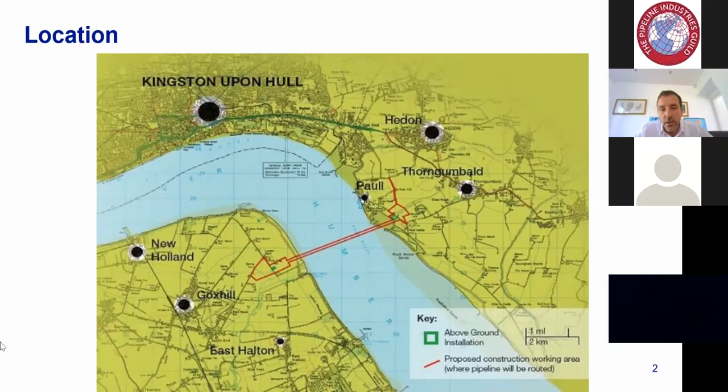So the reason why we're here, so the existing crossing of the Humber, which was laid in 1984, is approximately 5 kilometres. It is one of the most important pipelines on the national transmission system, and it takes gas predominantly from the Easington terminal and then delivers it through into the heart of England via this river crossing. It transports at peak demand up to 25% of Britain's gas, so it is a very critical pipeline in the network. Now, over time, the Humber estuary, the riverbed has shifted.

The tidal forces erode and move the riverbed, and it goes through 100-year cycles. And what happened, it had been identified that the riverbed was moving, and we've got another feeder crossing the river in a very similar location, feeder 1. That pipeline became exposed, and it actually became eroded underneath the pipe as well.

So it was what they call free spanning. So a decision was made that pipeline would have to be decommissioned. During the decommissioning of that pipeline, it was degassed and purged, and then it was being filled up with nitrogen. And it actually subsequently failed when it was being charged up with 2 bar of nitrogen.

So it was a real indication, whilst it was an older pipeline, that the existing Feeder 9 pipeline in a very similar location is potentially at the same fate as that. So in 2009, we had to lay what they called concrete fronded mattresses above the pipeline, and we had to do that during the slack water. So it gave us a window of around an hour and a half to place the mattresses in

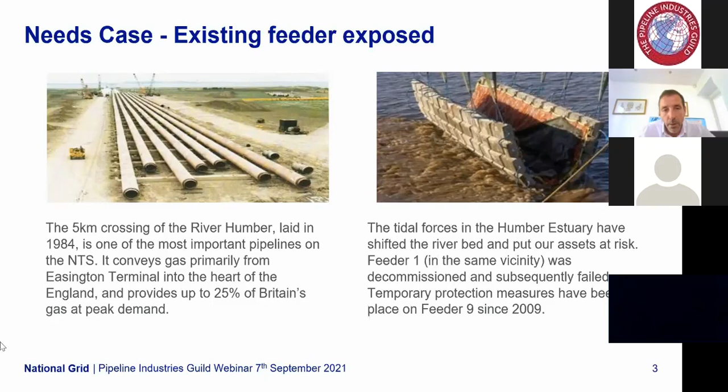So we had to consider a number of options. Now, obviously, primarily, we need to do this in an economical and efficient way, but we also need to select a technique that's actually physically possible to achieve, and also consider some of the long-term effects of the technique and also any environmental constraints that we may have.

So one of the options that we did consider was a direct pipe method. However, at this length, just over 5 kilometres, the technology isn't quite there just yet to get a pipe of that diameter, which is 42-inch, across that distance. We also looked at an immersed tunnel. These are predominantly used for rail and road tunnels.

Whilst it was a possible scenario, it would have been prohibitively expensive, and obviously Ofgem is not keen on the bill payers paying for something in addition to what we're trying to do, which is just replace a key transmission pipeline. So that wasn't selected.

HDDs, we have done some similar sized HDDs in terms of diameter in the locality. We did a 40-inch one over at the River Ouse in around 2008. But unfortunately for a 42-inch, we've not got the ability to drive that 5 kilometre distance. So that was discounted. We also looked at an open trenching technique.

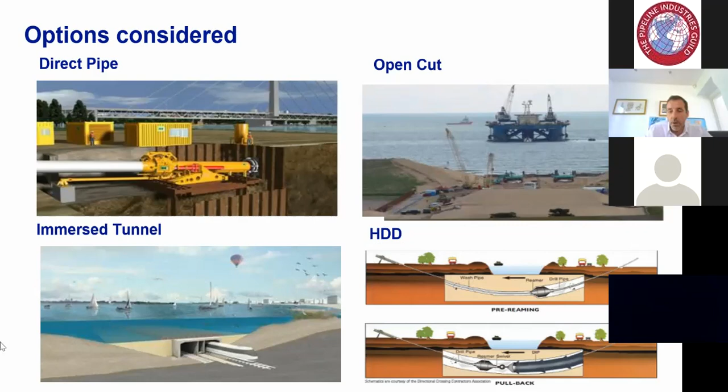So our solution was to build a concrete segment tunnel underneath the Humber estuary, which basically would be the world's longest pipeline river crossing in a tunnel. So it'd be just short of 5 kilometres, and it would be built in a 3.65 metre internal diameter tunnel with a 42-inch steel 70 bar pipeline inserted. And then there were a number of tie-ins at either side of the river below ground to the AGIs.

There were two similar projects out in the world that we were able to reference. So there was the 4-kilometre River Ems crossing between the German and Netherlands border underneath the River Ems estuary. And there's also a 4.2-kilometre Santos crossing in Queensland, Australia.

The key thing to note there is the length. So one's at 4 kilometres, one's at 4.2. We're obviously heading towards a 5-kilometre zone. So actually, this hasn't been done before at this length. So that brought its own challenges, to actually get the pipe inserted.

There were some significant technical challenges. So those were the ground conditions for tunnelling, which I'll pick up on a little bit later on, the pipeline protection, and finally the pipe insertion. And that pipe insertion issue, with the pipeline protection issue, actually evolved during the detailed design process.

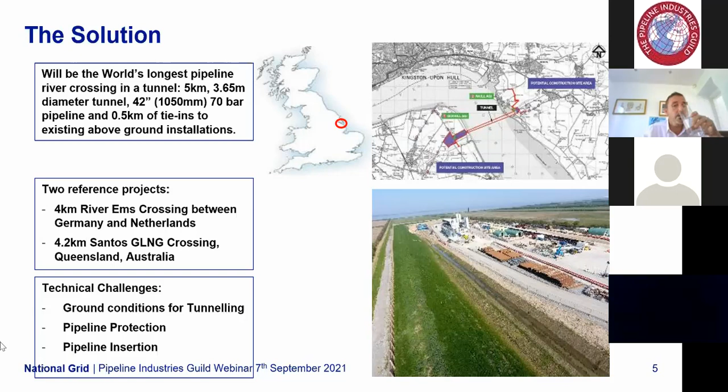Some of the other constraints and things that we needed to consider were the environmental designations of the area. It's probably one of the most highly designated locations in the UK. You might think, well, it's near Hull, it's quite an industrial place, but actually this has got a number of key designations. It's a Ramsar site, which means it's a protected wetland with a special status.

It's a special protection area for overwintering birds, so it's key for the migratory winter patterns for the overwintering birds. It's a special area of conservation for flora and fauna. It's a triple SI, so a site of special scientific interest. There's a migrating birds wetland area. There's also the RSPB Paull Holme Strays Reserve in the location.

There are intertidal mudflats, which are really important for the curlews that overwinter in the area. That's one of the key feeding areas for those birds. And then there's a very heavily populated water vole environment as well. And not only have we got that, but we've also got the standard badgers and protected wildlife to look after. We've also got Schedule 1 birds in there, so we've got marsh harriers in the area. So we needed to make sure that we protected those and our works didn't have an impact on those.

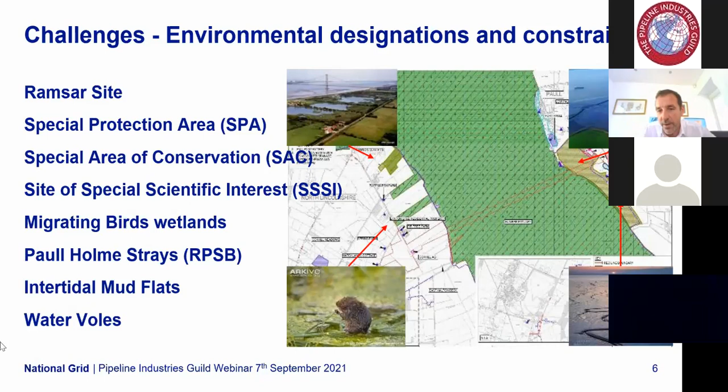And I think that really points you to one of the reasons why we didn't do the open cut again, because we would have to go through all of these areas and it just wouldn't be acceptable to do that now. But we were really proud, and the local community were really happy with the approach that we had taken in terms of how we protected the local flora and fauna and the wildlife.

Because there was such a risk of flooding, we needed to make sure that our key infrastructure was protected. So the generators and the tunnel launch shaft had walls built around them to a height of 3.6 meters above ordnance datum, so that in the event of a flood warning and a flood, we were able to put the floodgates in and seal off those critical areas.

Also our site offices and compounds were raised up to above 3.6 meters, so that if we did have a flood, we would be able to shut down the site, get everybody away, and then as soon as the flood waters had abated, we would be able to return straight back to work without having to consider refurbishing offices and all those sorts of things. So there were certain key aspects that had to be considered as part of the works.

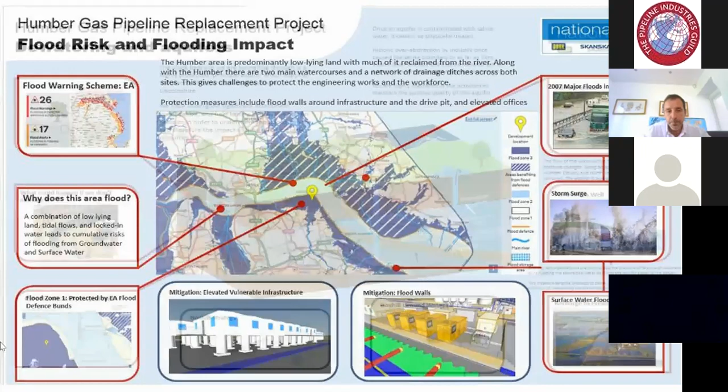But we were prepared. Fortunately, we only had a couple of alerts where we had to demobilise from site, but we never got to a stage where we actually got flooding on the site. But we were prepared for that. Another key aspect for this project is that we're working above an aquifer.

So to actually build our tunnel, we started over at Goxhill on the south side, and we built a 210 metre long, 15 metre deep drive pit, which basically is a long ramp that goes into the ground. That's a sizable excavation, and to actually make the excavation, we needed to dewater. Now, to dewater the ground, obviously we draw water out, bend the water table, and it allows us to construct our pit.

But because we were in an aquifer, there was a real concern that as we were close to the river, it does have a saline element to it. So the concern was that if we dewatered and drew the water out, we could then actually draw saline water in and get saline intrusion into the aquifer. So a real concern for the Environment Agency was this, written really heavily into the development consent order, and we had to come up with a really innovative solution to prevent that from happening.

So what we did was, when we dropped our wells in ready for our dewatering, we actually put recharge wells between our pit and the river. So any water that we drew from the ground, we then recharged back in front of us. So in effect, putting a clean water curtain between us and the river. Now that worked really effectively,

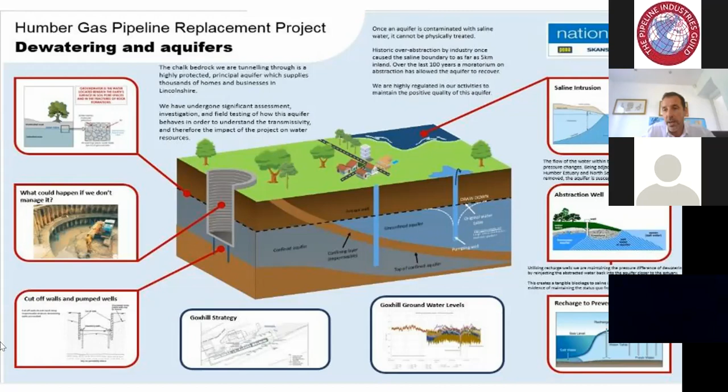Moving on then, so if you can imagine, we're still in the detailed design phase here at the moment. So we're building our launch shaft, but we've got to detail design the tunnel and the pipeline around it. And during that detailed design, it transpired that we came upon an issue with what they call CP effects on the concrete, which is concrete degradation.

And what that meant was that because we were going to be putting a pipeline through the tunnel itself, and we would potentially have to turn the cathodic protection system on, the action of the cathodic protection can actually degrade the concrete segments, and the higher the power that you put in through the CP system, the higher the degradation that you can get on the tunnel lining. So that was a real problem for us. So during detailed design, this was identified, and we needed to come up with a solution to ensure that the 120-year design life of the tunnel wasn't affected.

So in effect, the way that you minimize the effect of CP on the tunnel itself is by minimizing the need to actually have the CP turned on. So what we did was we came up with a solution that in effect, we had a 42-inch steel pipe that would just be dual FBE coated, standard UK pipelining technique.

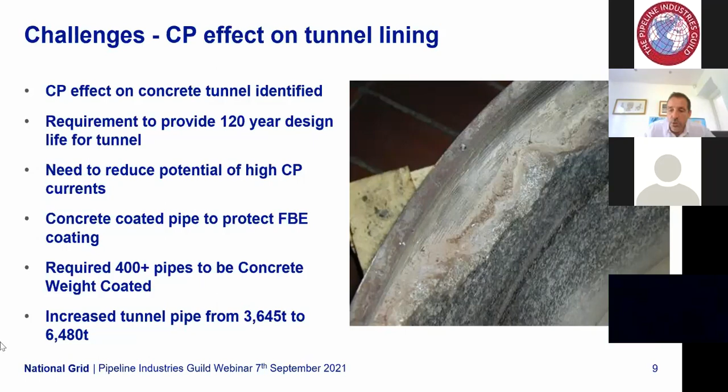When we were building the tunnel itself, just for removing the excavated material, there were just short of 10,000 vehicle movements. So that's 10,000 wagon journeys up this road, empty wagons, to then come out on the outward bound route fully loaded with the arisings from the tunnel. We also had the segments to be brought in here, and all the stone and materials required to construct the site. So it was very challenging.

And one of the things that we had to do very early on was engage well with the local stakeholders. There were a few teething troubles to start with, but we had 24-hour hotlines, and we were able to react very quickly to any concerns. And in the end, from the initial phase, we came to be a very positive player in the area, working a hell of a lot with the local schools and demonstrating how we can manage large-scale construction projects in rural areas, to the point where the local councillors were actually holding us up as the examples in the area of how traffic management should be done.

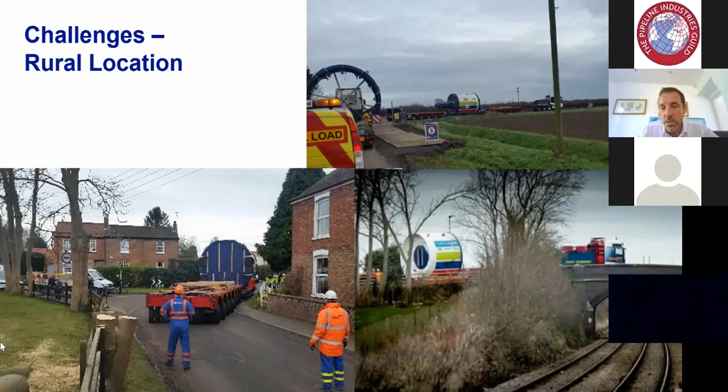So I mentioned before some of the challenges with the ground conditions. So predominantly the ground where we were excavating through was Flamborough and Burnham chalk, but that was overlain, certainly at the Goxhill side, with the glacial till, which is a clay-like material. So while we were boring through with the tunneling machine, that gave us some problems initially, because the clay element was clogging up our screen. So that slowed us down a little bit until we got it to the fine tune where we needed to get to, and then we were able to get some good production.

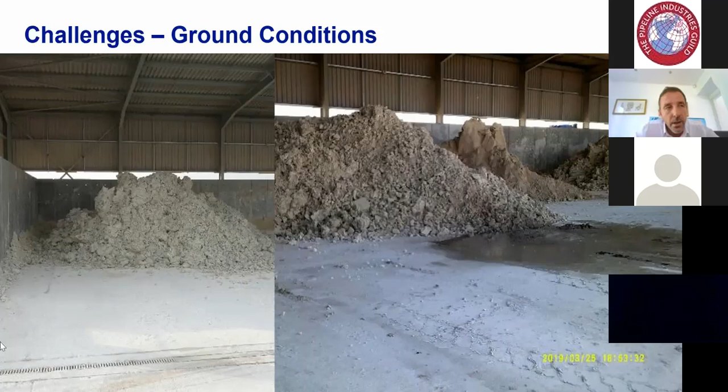The arisings then became predominantly chalk for probably 80–90% of the drive, and that allowed us to actually take that material. You can see here in some of our bays, so the shot to the right hand side is a filter press. So the tunnel boring machine actually ground the chalk into a slurry that was piped to the machine, and then the slurry came back from the face of the machine to the slurry treatment plant, heavily laden with this chalk milk.

That was then pressed so it can be solidified, and it was transported from the picture on the right into the bays on the left hand side, where it was chemically tested to make sure it was within the tolerances of the requirements for removing the material. And then this material was taken away and reused to reinstate a local chalk quarry. So over 99% of the material excavated, and it was over 190,000 tons of material in total, was actually taken away for reuse. So it wasn't deemed to be a waste. So it was a massive success really for the scheme.

One of the other key things though is that on the Paull side of the river, we were going into areas which had been laid down from the glacial periods really, and we had to cut through old incised river channels. So we had to build a reception shaft that was 15 meters diameter, 15 meters deep, and during the excavation of that we found sands, gravels, lots of fluvials and alluvials that were laid down into old riverbeds, which is not very good for a big heavy tunnel boring machine to work through.

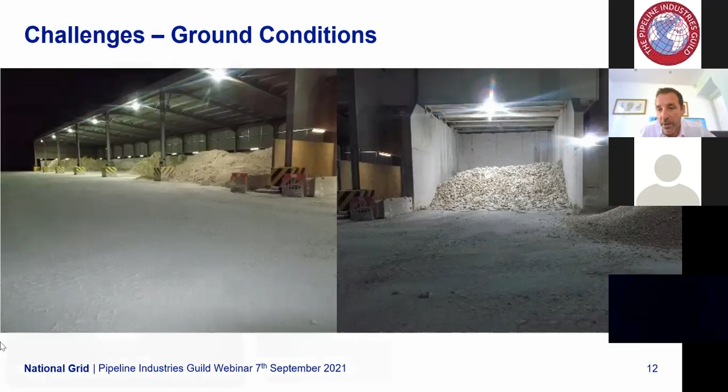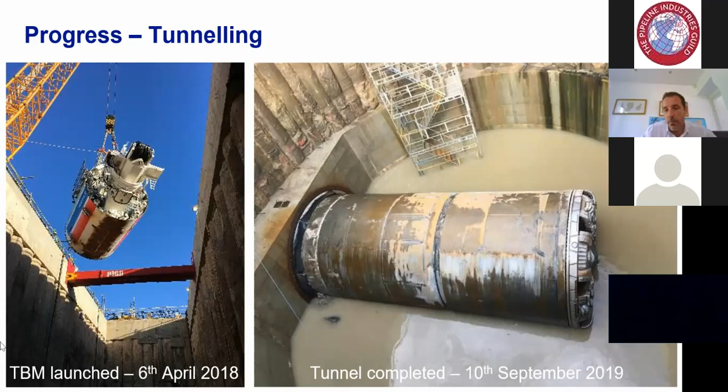So what that meant was that we'd constructed this tunnel, sort of 5 kilometers in length. We'd done it to the right quality. We'd ensured that there were no major safety incidents associated with the tunnel build. And this tunnel itself isn't a straight tunnel, in the sense that it's like a bathtub curve.

So we drove down from ground level at Goxhill to the tunnel portal, which was about 15 meters below ground. So we ramped down to 15 meters. Then we started to build the tunnel. That then drove down deeper, so we got to about 35 meters below Ordnance Datum. We then travelled underneath the estuary through the deep water channel and then back up to the other side. And we then received the tunnel boring machine approximately 15 meters deep in the shaft from the previous picture.

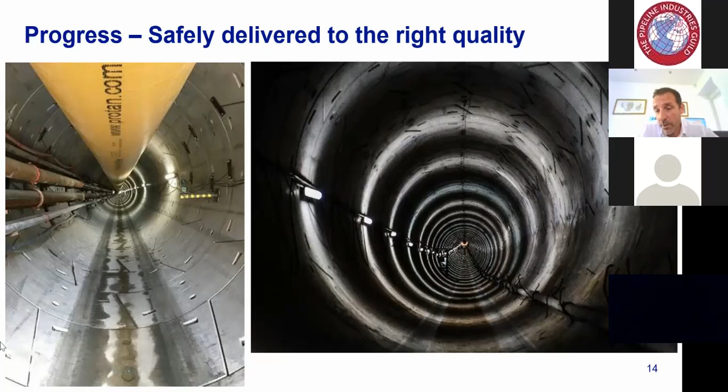So we're now sufficiently clear of the bottom of the river for any erosion, and also if there were any plans in future to maybe deepen the channel if they wanted to get shipping further down the river. So safely delivered and to the right quality.

So once we built the tunnel, what we then needed to do was actually fill the tunnel itself with water. Now this water is actually purer than Buxton Spring, Evian, your tap water at home. And the reason why is that for the CP system to work correctly for the pipeline, it needed to be of a certain chemical makeup. The first element really was we needed to make sure that there was no microbiological attack that would happen in the first 200 days of the pipeline. And the way that is reduced is by removing those nutrients out of the water.

So once we built the tunnel, we had to go back and we spent a really large amount of time and effort actually cleaning the tunnel itself, physically scraping and washing down to remove any oils that could become the food for the microorganisms that we would be concerned about propagating and growing in the tunnel, and then obviously having an impact on the steel of the pipeline itself. So that was one element.

And then the water itself, we got the water from the local aquifer, but we then had to send it through quite an onerous water treatment plant to get to the right chemical makeup. So that took quite a long period of time. But in effect, once that was completed, we knew then that we had the right type of water in the tunnel ready for us to push our pipeline in. And that water is continually checked going forward to make sure that the chemical makeup of it stays within tolerances.

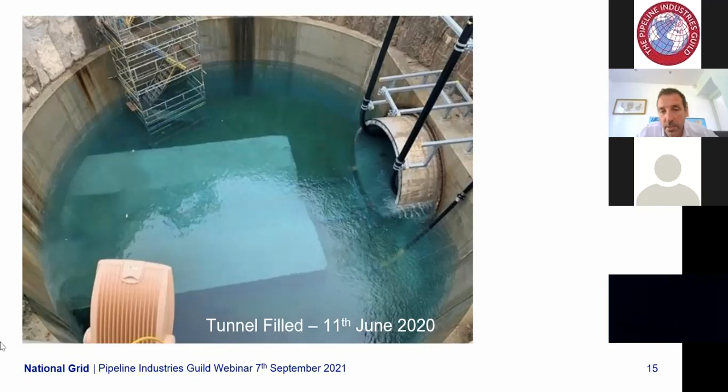And the CP system as well was designed in such a way that the reactions around that were minimized. So the change to the chemical makeup, any high pH driven from any of the cables, etc., was mitigated by the CP design. So we've successfully discharged the DCO requirements. We've built the tunnel now. We've designed the pipeline and the CP system.

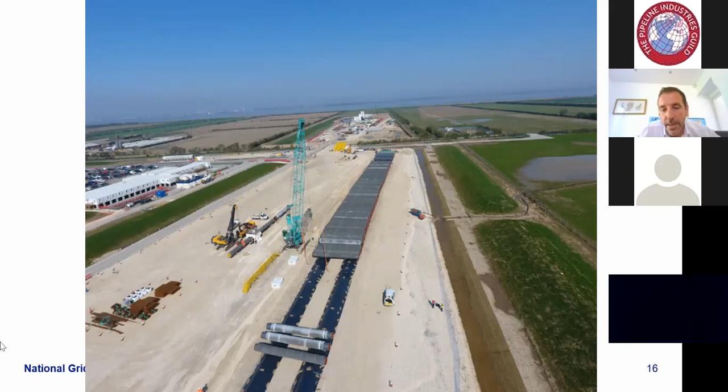This is a shot much later on, and you can see now that we've got a number of strings there already welded up. So our pipe crossing is just short of 5 kilometers. So that meant that we needed 8 pipe strings to make up the total length of the tunnel itself. So we didn't have a 5 kilometer field that we could just string it out and push it all in one go. So the pipeline was welded, tested, AUT tested, coated, and then it was then concrete coated as well for the infill sections.

And all those sections were then moved across on a bespoke bogey system that allowed the pipes to move across one by one. So they were welded on the welding string and then moved across. And you can just see on the left-hand side the little yellow bogies that were used. So they were pulled across using the blue winches to the right-hand side of the shot, you can see. And they basically pulled the pipe across in a very controlled manner. So they were ready to go into the firing line, ready to shoot them into the tunnel itself.

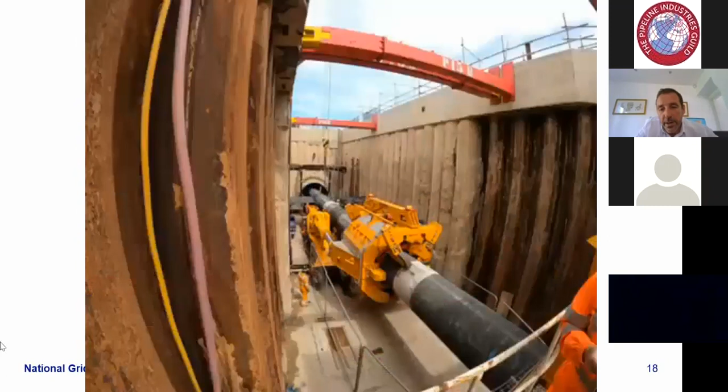So once we'd welded it all together, each string, we'd move the first string down to the tunnel portal. So this is the drift shaft where we built the portal itself, and we've got our pipe pushing machine in here. So there's a 750 ton thruster here, and there was a 500 ton thruster further up the shaft. And that allowed us to bring the pipe into the location in a controlled manner. So we brought one pipe in, we then pushed that in, and then we brought the next pipe in behind it. We welded it, tested it, and then coated it, and then we pushed that in again.

So I'm just going to play this short video. There's no sound, but you can just see the operation. It's obviously been sped up, but this is the operation that we undertook to push the pipe in. And if you can see just in the background there, what they're doing there is they're actually putting on a polyurethane collar. So we'd fill the tunnel with water. Obviously, with it being a bathtub curve, it doesn't quite come to the very top, but it comes up halfway up the tunnel there. And then we put a collar on there. And what that collar does, it reduces the impact of the friction of the pipe inside the tunnel as it's being pushed in.

And one of the key things is, there's been a 4 kilometer and a 4.2 kilometer pipe pushed in, but there's never been one just short of 5 kilometers. And we were concerned after the development of the CP design requiring concrete coating on the pipe, what impact that would have on the pipe push and the stresses, etc. But it actually benefited in one sense. It stiffened the pipe up. But we were able to do some really sort of finite calculations to determine actually we weren't going to overstress the pipe by pushing it in, and the fact that we were in a tunnel, it sort of self-corrected itself into the bottom of the tunnel.

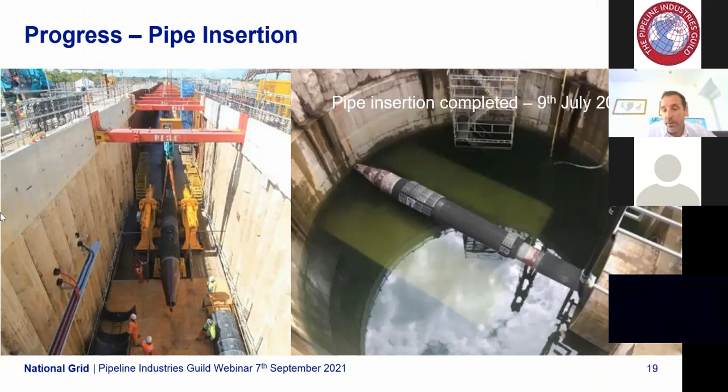So that's just a shot really to show the progress of the pipe insertions. That was just before it started, and then we completed that on the 9th of July 2020. Really happy day for the project. We were working closely with the HSE at this time as well, and we were able to demonstrate that actually we could probably push a little bit further than was designed, which was good.

But what did that do? Well, that gave us the world's longest hydraulically inserted pipe in the world, measured to the exact number of 4,963.7 meters. So the team were really pleased to receive that. So the efforts of National Grid, Porr and Skanska and A.Hak all culminating to achieve this world record. So real accolades for everybody involved and the contract partners. So something that we were immensely proud of.

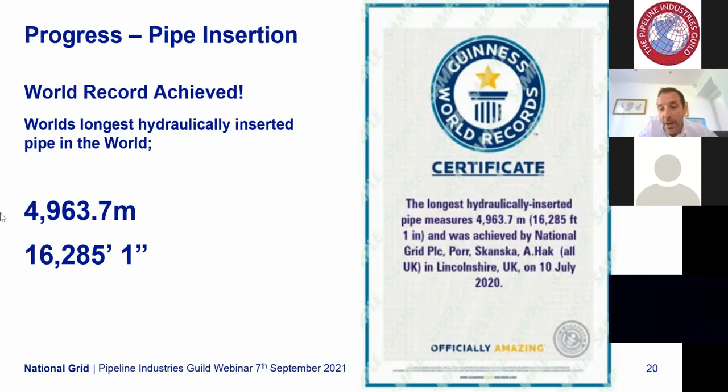So it meant that we would potentially have to leave our connections until later on into the following year, which wasn't very palatable for anybody, meaning that the pipeline that was in the river would be still at risk for that sort of final winter when tidal flows are highest.

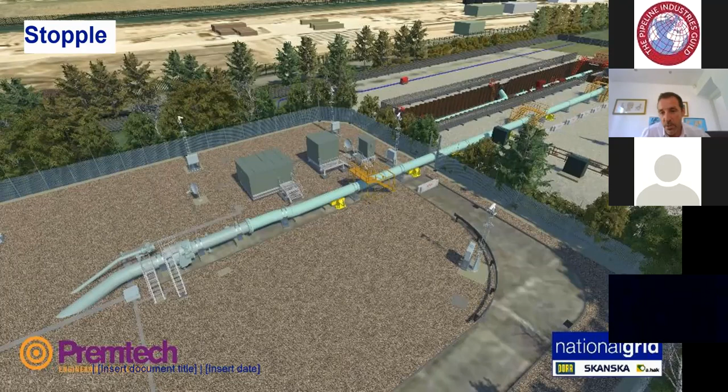Great collaboration. There were some sleepless nights in terms of making sure we'd got the design changes in place, etc., and making sure we had the right materials available. And there was a lot of chasing down of those elements. But we also had to consider that we needed to make sure that the existing security of this site was maintained to the same standard.

So we were able to bring the pipe in through the existing emergency access gate. So we had to liaise with the HSE and our security people to make sure that we did that in a way that the site remained protected. And this is just a shot really of the cofferdam that we had to put in place to facilitate those connections before they took place, with all the concrete supporting the pipeline, etc.

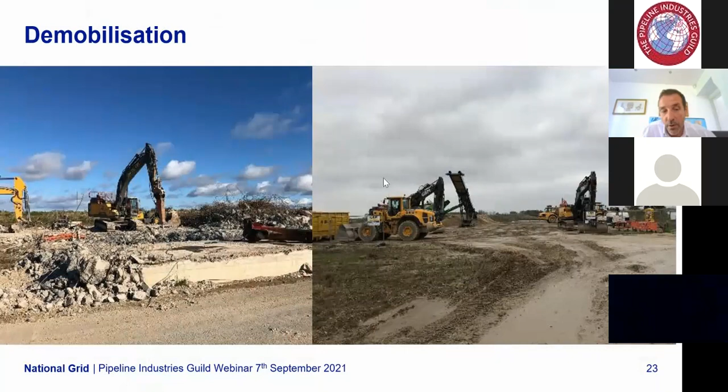So then we'd done that, we got it all completed, we got the gas on in December last year, which was a great achievement for everybody, and then it was down to demobilisation. So the shot you saw before with all that process plant, we had to then take this back and put this back down to farmers' fields as what it was beforehand. So we had to demobilise all of this and take it away from site, which then leads to the reinstatement element of the scheme.

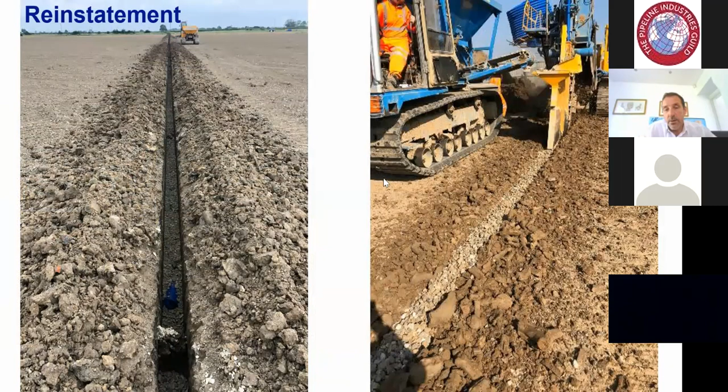So we've been busily redraining the whole area since spring this year. We've demobilised all the construction materials, and we've been busily draining the site. So the picture on the left-hand side is what we had. That was the shot you saw before from a different angle, looking back from the Humber estuary down towards the tunnel entry and the pipe stringing field in the far distance.

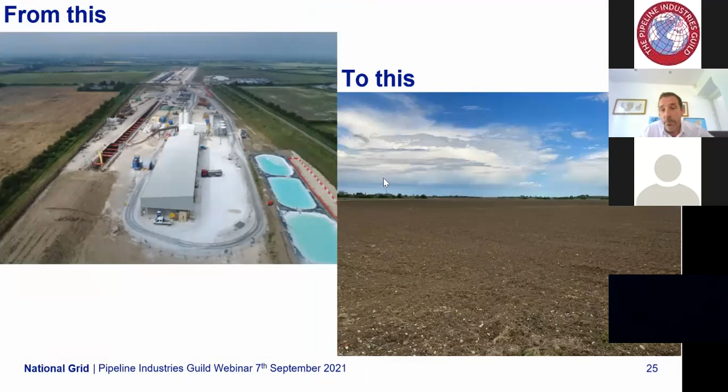All of that had to be taken away and returned back to the shot that you've got on the right there. So I'm really pleased that last week we were able to hand the land back to the landowners for those guys now to farm the land as you would expect.

So successes. So what's gone well? Well, the development consent order, the delivery of that was a big concern at the beginning because it was very restrictive and prescriptive.

But actually, in hindsight, that was a very good thing because it gave everybody something really focused to go at. And once we'd completed it to the standard, there wasn't any potential delay. It was clear what needed to be done. We had fantastic stakeholder engagement with the local community. We spent a significant amount of time and effort with the local community, supporting lots of local charities. And as I said before, we were held in high esteem from the local councillors as well, in terms of how to do a large scale project in a small local community.

The Environment Agency and the HSE, we had regular visits from the HSE, and they were extremely pleased with what they saw. We worked really closely with the HSE to make sure that everything that needed to be and should be mitigated was mitigated. Environmental management was fantastic, well done. The pipe stringing and welding, once we got that solution in place, we really got on with that and got on with the plan to make sure that was working. The arisings management was all dealt with. As I said, 99% of the material was taken away, not as a waste, but for reuse. So that's a massive achievement for a project of this size.

Clearly, the tunnel completion under the estuary safely, bearing in mind the whole tunnel collapse, that was a major milestone for us, as was the pipe insertion, you know, it'd never been done before at that distance, and also the world record. And then the connections done during the winter. Again, we were really pleased with how we'd managed to achieve that. And then finally, the demobilisation and reinstatement, we've now handed the land back. We're probably on site for the next 2 or 3 weeks, just clearing up the final remnants of our presence there, and then we will be away.

Just very briefly, I'll just give you some facts. So the tunnel boring machine was 4.4 OD. The shield, the front bit, was 225 tons, and the total TBM weight was 510 tons. It was, I think, the length of 8 buses. So it's quite a long chain that supports the front cutting face. The ID was 3.65. The segments were 225 mil, and they were 1200 mil in length. And the tunnel length was 4862, which is slightly shorter than the world record pipe push, because that's just the length of the tunnel. The pipe was actually 100 meters longer because of where we pushed it from the shaft.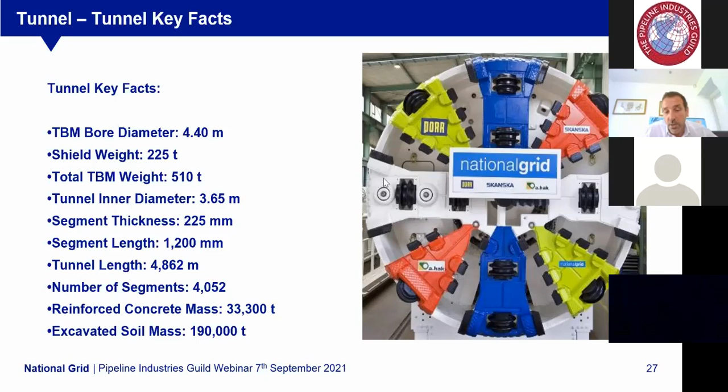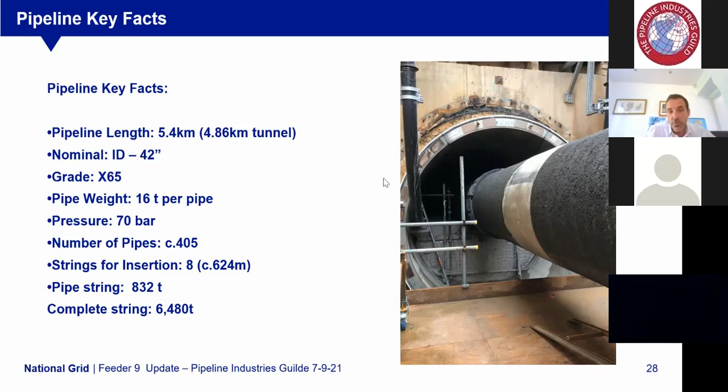Over 4,000 segments, 33,000 tons of concrete, and the excavated soil mass was 190,000 tons, of which 160,000 tons were chalk. And then the pipeline itself was inside the tunnel 4.86, what we pushed. 42-inch X65, 16 ton per pipe. It ran at 70 bar. There was just over 400 pipes. Each string was around about 624, and the pipe string was 832 tons each, equating to just under 6,500 tons. So I'll now hand back, and I'll stop sharing.